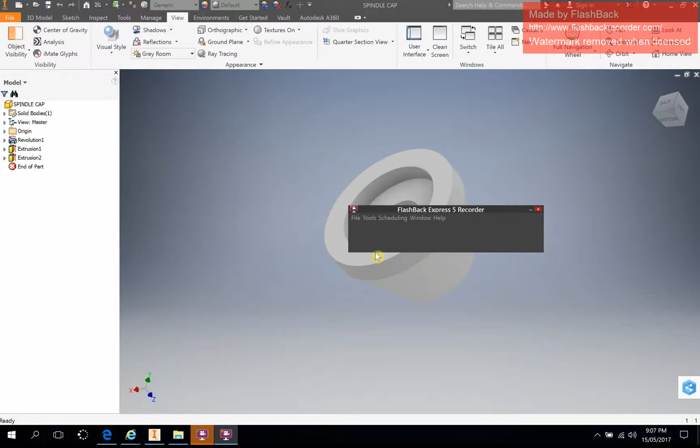Hey guys, this is just going to be a quick video on how to draw up this spindle cap that is part of your assignment for the G-clamp. Now, to get a shape like this, it's fairly complicated because there's a taper on it and it's a little bit more than just extruding some circles.

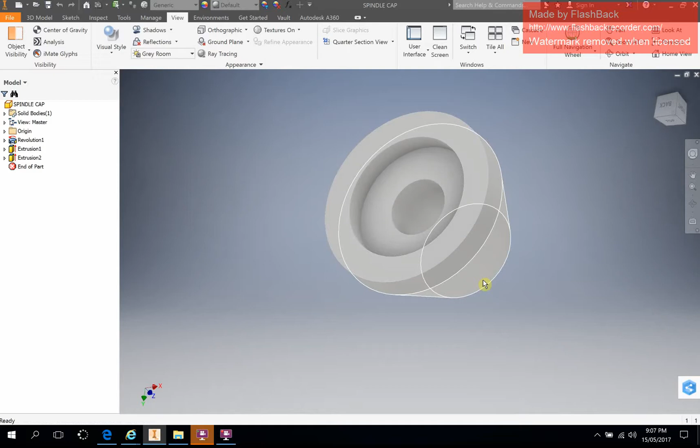So you could use a loft command and have two different planes and loft one shape to another, but the easiest solution to do this spindle will be to do a revolve. Now we're going to start from scratch again in a second, but let's just have a look at what we know so far with this shape.

So here's a drawing that you guys should have of a 2D drawing showing the spindle cap. We've got some hidden detail here showing a hole and a rebate. What I'll get you to do when you draw this spindle cap for the first time, just pretend that hole is not in the center or that rebate, and we'll put them in later on just using a simple extrude.

For now we just want this outside profile, and to get that, what you really need to do is think of this center line as your axis that you're going to revolve the shape around. So all we really need to do is draw 1/2 of the profile that you see here. So we only need to draw that one side.

So if we take a look at these measurements, we've got diameter 20 for our outside. So we know that from here to here is only going to be 10 mil. We're then going to drop down 3 mil. I have no idea what this angle is, so I'm going to leave that line out. I know that from here to here will be 3 mil plus 10 mil, so 13.

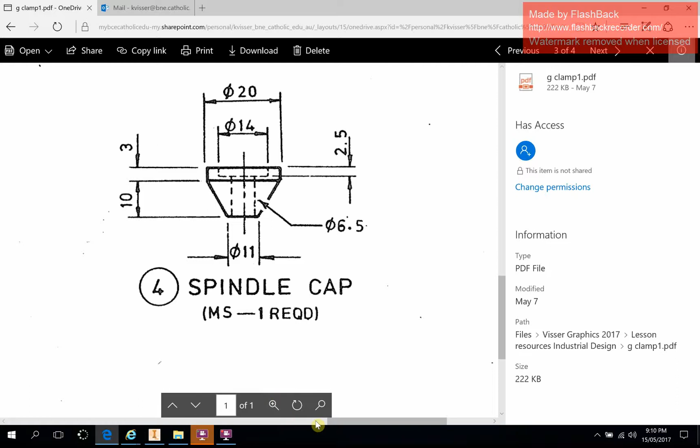Okay, so I've got these side by side now, and probably not a bad idea if you do this yourself as well. So I'll click on line. I'm going to start on my yellow spot as per usual, and I'll start off by going down my depth of 13. I'll press enter. I'm going to zoom out a little bit so I can see my whole drawing here. So I've got 13 by adding 10 and 3. I'm going to go now to the right, and I'm going to go for 5.5, and I'll press enter.

And this is the unknown. I don't know what that angle is yet, so I'm just going to press escape, and I'm going to go back to line. I'll go back up here. I know that I need to go across 10 mil because 10 is half of my diameter 20, which gets me from there to there. I'm now going to come down 3 mil, enter. So now I can fill in the blanks.

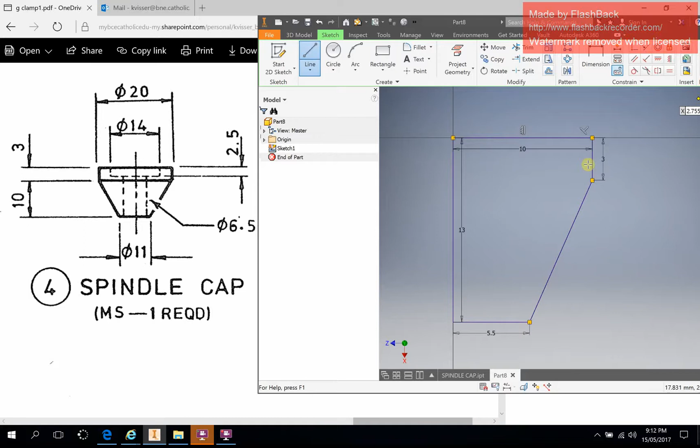So like I said, I have no idea what that angle is, I have no idea what the length is, but I do know everything else. So I'll do that first, and I'll finish my profile. So from here, I'm not going to use this drawing anymore. I've got this profile, I'm quite happy with it. I'll see if I can expand this back and get it back somehow. Might need to finish my sketch first. Oh, there we go. I'll open that up. There we go. Sweet. So I've got this profile. Finish sketch. There's my profile.

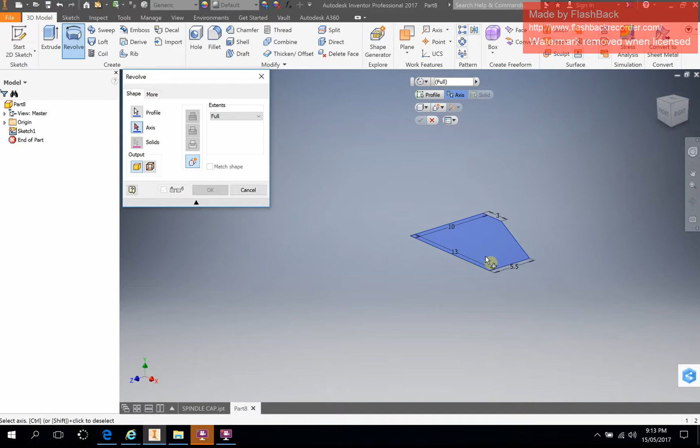Click on revolve. Profile has been selected already by the computer. Your screen may look like that. Click on the down arrow to expand it. This is the important part, the axis. So the axis is where is my center line. So if I go back here, that's the center line that I want to revolve around. I need to find that on my drawing. So it's going to be this line here. I can then click OK. And I've got my profile.

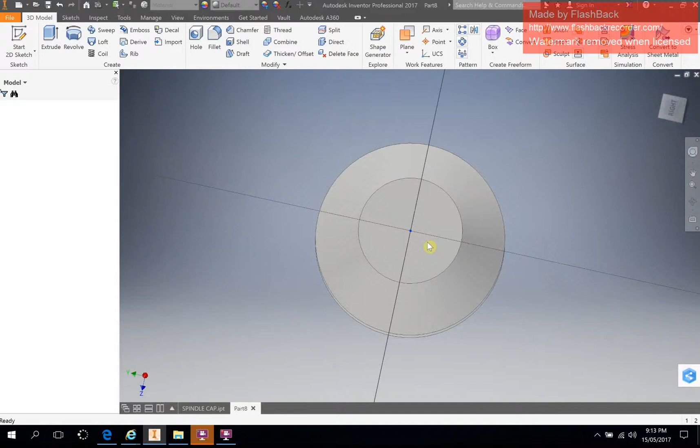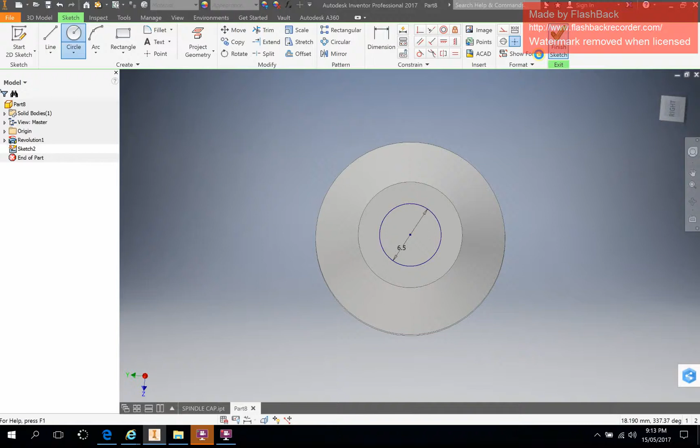So if I then click on this bottom face here, I can start a new sketch and I can put a circle in here, and my diameter is going to be, here's where a few people get confused, they say 11, well the hole going through there is 6.5, so I'll type in 6.5, press enter, finish sketch, extrude this surface in the opposite direction, distance will be all, and I'll click OK. So I've now put a hole through that bottom part.

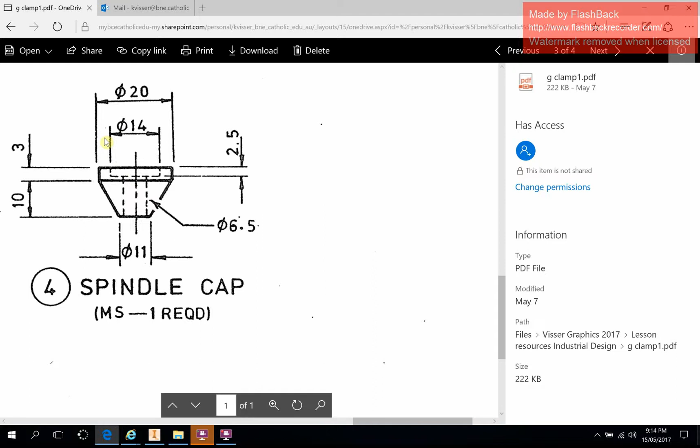I'll select this surface and I'll go create sketch. I'm now going to draw a circle here. Check my drawing again. From there to there, so 14mm diameter, and we're going 2.5 deep. So I'll punch in 14, enter. I'm going to go finish sketch, extrude, make sure I'm cutting down, 2.5 deep, click OK, and that is your spindle cap finished.

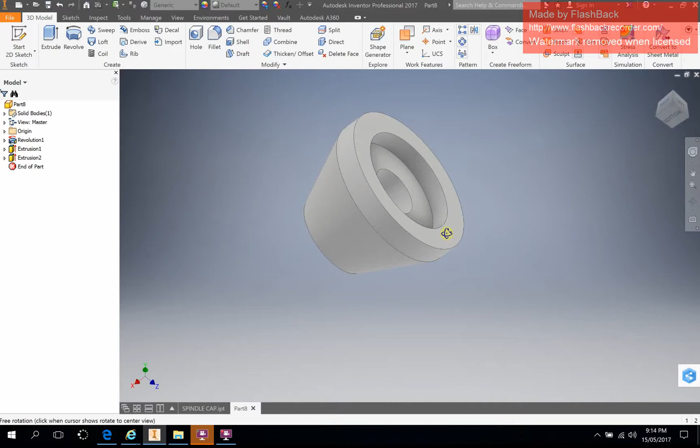And like everything, guys, if you've made a mistake or something doesn't look quite right and you realise what that mistake is, your timeline is over here. So you can change a lot of different things there with your extrusion. I would have to open it up and I'd change the sketch if I used the wrong diameter on something. My revolution, I can expand that and I can change the profile there.

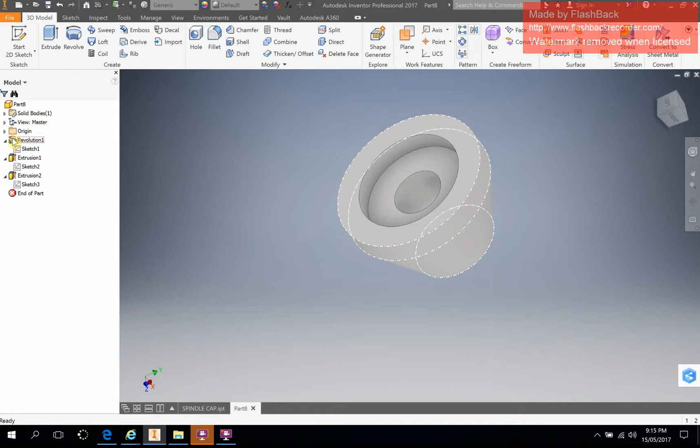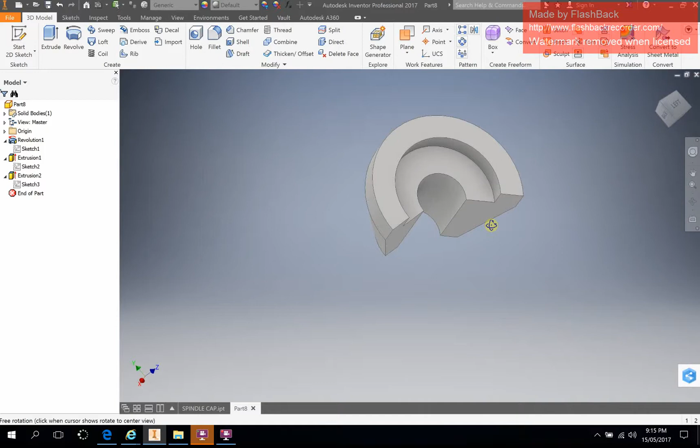Okay, and the other cool thing I can do with revolution, if I double click on revolution, you don't need it for this drawing, but I'll just show you this because it's pretty cool. So if I go to angle, I can tell it that I only want it to do 180 degrees, and I'll get halfway there. We might go 220, that'll probably look pretty cool. And I'll click OK. And so if I wanted to create a part like that, I could, and it will give me a nice little section of how that part looks.

Hopefully that helps you guys with your assignment.